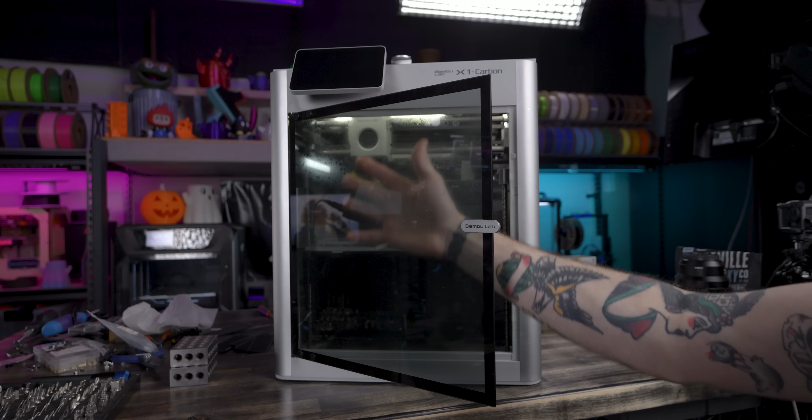We're absolutely going to be making some performance modifications to this machine, but first and foremost, I need to focus on some quality of life improvements and maintenance, such as when you look at this door, it is cloudy, foggy, and nasty, because these days I mostly print ASA filament, which puts off volatile chemicals into the air and puts a film on the inside of this machine. So first things first, I need to clean this thing up, probably adjust the belts. I have over 1,900 hours and I can't remember the last time I did that. And then we're going to install filtration in this machine.

Let's pop the back panel off this machine because I'm sure some of you are going to say, well, the Bambu X1 has a filter, and it does. Inside of there, it has a charcoal filter system that doesn't work properly in my opinion. You see, a machine like my Voron 2.4 has the Nevermore inside of it, which draws in air from inside the chamber, blows it through charcoal medium to filter it, and then back out into the chamber to just circulate the air inside of there and filter it as it prints.

As we're removing the filter from the Bambu, you can see that the fan blows outside of the machine. In fact, Bambu calls this the chamber temperature regulation fan, not a filter fan. This really doesn't make any sense to me because any material that you're really going to want to filter through charcoal, you're not going to want to take the air from inside of a chamber and blow it out the back of the machine as this setup does. That's only going to reduce your chamber temperature. That's why Bambu calls it a chamber temperature regulation fan.

So what we're going to be doing is installing a BentoBox, a community mod originally intended for Bambus but used in various machines at this point. It is an add-on filtration system. It has a HEPA filter to reduce microparticles and charcoal filtration for this machine. It uses a pair of 4020 fans that draw through a HEPA filter from a robot vacuum, through charcoal, and then blow it down out the bottom of the housing. It'll make more sense as we put it together and you see it go together.

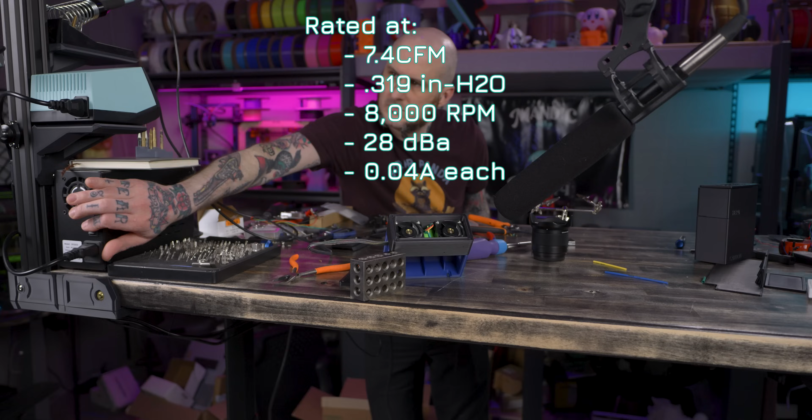The fans that I'm going to use are a pair of Sanyo fans I picked up off of DigiKey that seem to have a good sound profile while still having plenty of static pressure to do what they need to do, moving air through these different mediums.

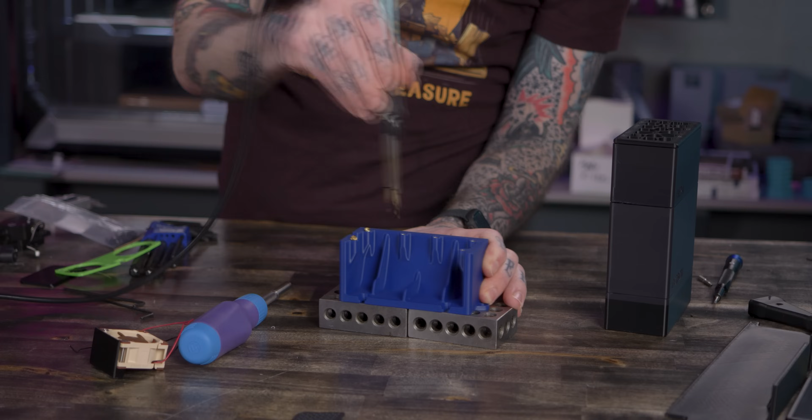Assembly of the BentoBox is pretty straightforward. 6 heat press inserts go into the base. Those are the only heat press inserts in the whole setup. For mine, I designed and printed this 85A TPU gasket to isolate the fans and reduce the vibration from them. This is something I'm starting to do with fans now and testing out. The gasket and those get installed into the fan housing, which then screws into those heat press inserts in the base.

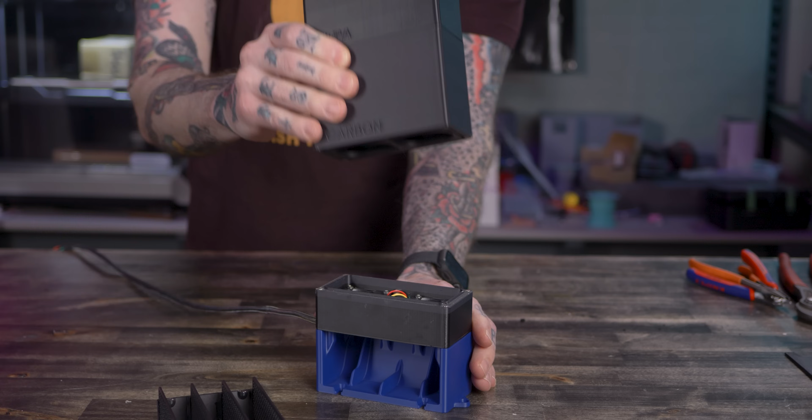Then the entire rest of the filter stack, the carbon section, the HEPA section, and the grate that goes on top all get some magnets installed into them. I use the little CA glue as well, and then they just magnetize together, which forms the tower of filtration that is the BentoBox. Now comes time to get this all installed into the X1, which is really straightforward.

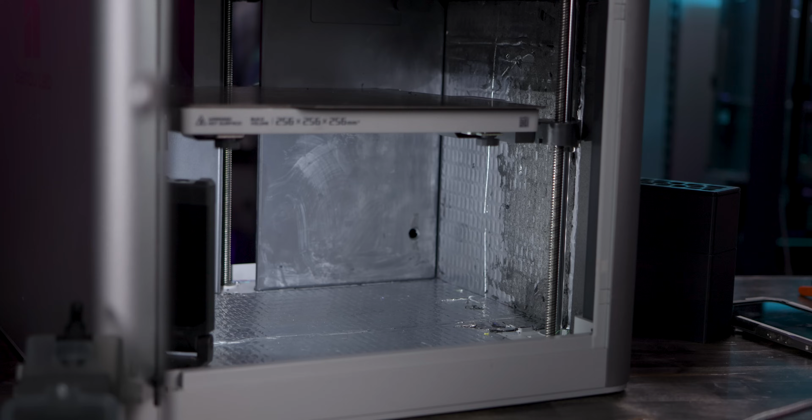In my particular instance, I had to remove the insulation that I had on the inside wall where this is gonna go, but that's something I put in there, and I drilled a hole in the back wall to pass the wire through. Some folks have squeezed it between the aluminum side panel and the back wall. I didn't want to do that. I fed it through a hole. That way it's just really direct, straightforward, and not squeezed in between the panel.

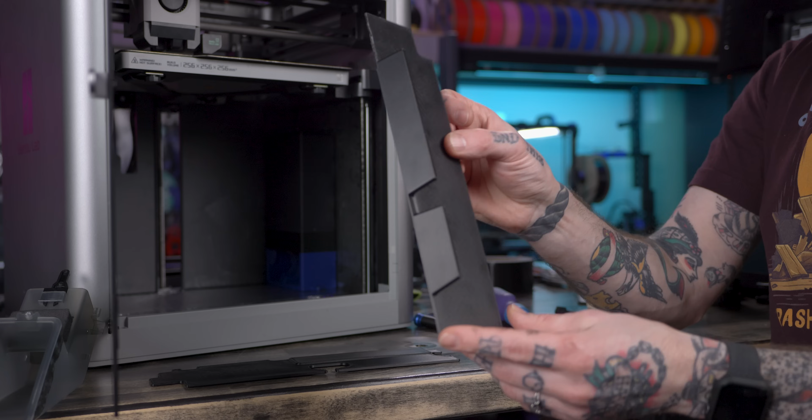Installation is really straightforward with just a single M3 screw going down into the base panel. I also put a piece of VHB tape on the back side of my fan housing so it's supported against the side panel. Of course, our next step is wiring up the fans, but I want to do something while I have this apart. I designed a handful of 3D printable block-off panels for this machine to separate the print area from the electronics box, hopefully to increase the chamber temperature and reduce the temperature inside of the electronics area.

These all mount with VHB tape, and the first one I'm installing does require that the filter housing be removed, as I have done on this machine, so that's not going to be for everybody. But the other ones other folks might find useful. This one is for the big gap that's underneath the poop chute. It VHB tapes in place and then sandwiches between the poop chute and the back panel to fill that oversized gap that doesn't really serve a purpose.

The next one does require that the poop chute's not in place, and then it has to shoehorn up into place, and VHB tapes to the side of the power supply unit, but it has a pass-through for the bed wiring to go through it, and this is the one that's probably doing the most to separate the electronics from the chamber. The last one doesn't even require the back panel to be off the machine.

It installs around the left-hand motor and blocks off the vent that brings fresh air from the electronics box directly into the chamber, reducing chamber temperatures. I believe anyway. I don't actually know if these are going to achieve what I want them to. We'll find out later in the video.

Now we can get into wiring these fans up. You might have noticed earlier that I did get 4-wire fans. That was because I'm going to replace the chamber fan directly and use its wiring so the screen controls and G-code controls from the slicer will control my BentoBox now. Previously, when I installed the Noctua fan in this, I did figure out the odd color scheme on the wiring that Bambu uses. It is black for 24 volts, dark gray for ground, light gray is our tach signal, and white is our PWM signal to the fans.

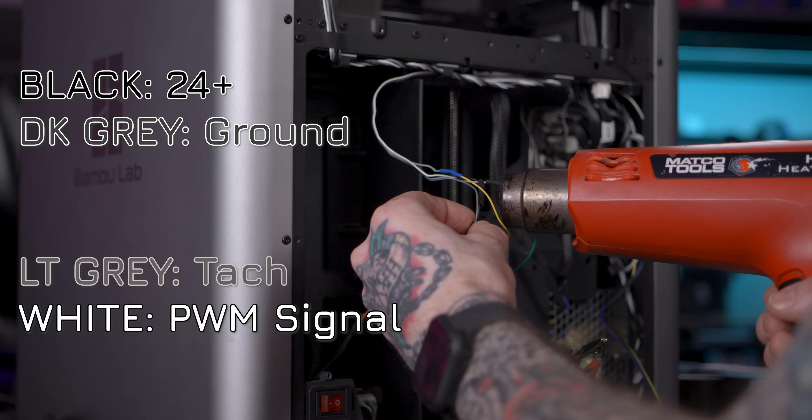With that soldered up, heat shrunk, and all set up, I have a fully functional filter system inside of the chamber of this machine now, and I can control it through the screen-ish. The RPMs on the fans that I installed are higher than the original chamber fan, so I can say set it to 50% fan speed via the screen, and it will set the fans to 50% as I intend, but it will read as 100% because the signal that it's getting is that the fans are running faster than it expects.

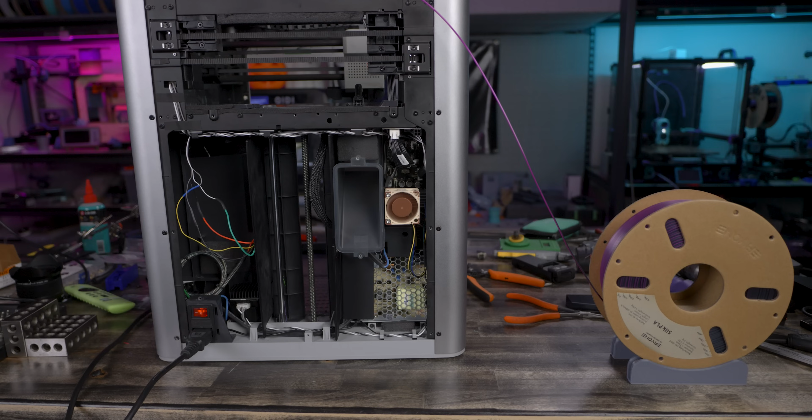That's okay. More than likely I'll run it at 100% all the time anyway, but I can still set it to whatever percentage I want. It's just not going to read properly on the screen. That's all. Before I put the back panel back on, there is one more thing in the electronics box. I designed what I'm calling the fresh air fan mount. It is a VHB tape mount that you can put a 4020 or a 4010 fan on.

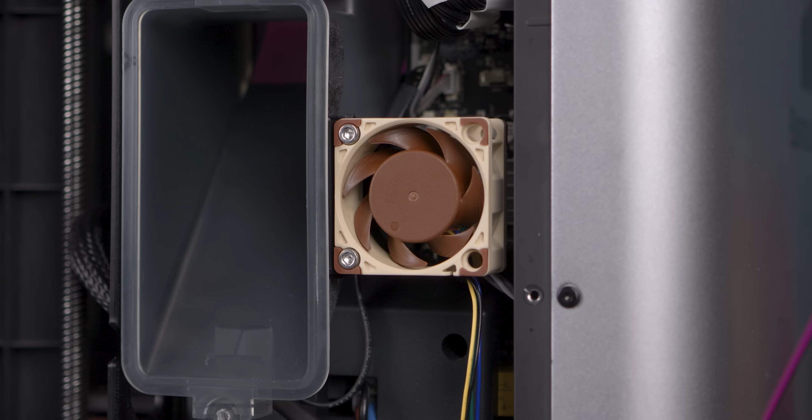I'm using a Noctua in there that I wired up to the original connector for the mainboard fan, and it draws fresh air through the grate on the back of here to better cool your electronics and get rid of that failure-prone stock fan. Though you could use the stock fan and it would get fresh air through the grate too. With those quality of life mods out of the way, it's time to get into performance.

And we're going to start by upgrading the extruder. The extruder assembly on the Bambu X1 ships with hardened steel gears inside of it. The P1 series don't. They come with regular stainless steel gears. So if you're going to be printing abrasive materials often or looking for overall longer service life, you're going to want to upgrade those. Bambu will sell them to you for $19.90. Or you can get these gears from the folks at Fysetc.

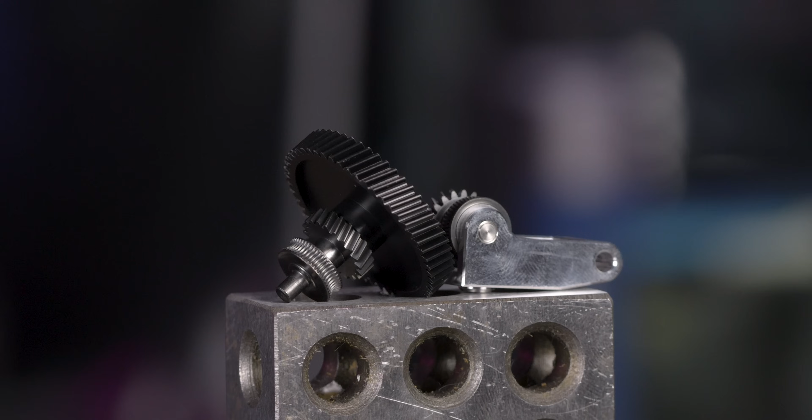These claim a couple of things. They're hardened steel and have a nanopolymer coating on them for longer service life. They have helical cut gears for a better mesh and more surface area on the teeth that are engaged with each other, again for better service life and possibly better torque transfer. The hob gear, the part that actually grips the filament, is machined onto the same shaft as the helical gears that mesh together. The idea there is to improve concentricity. It's not an easy word to say. It means they're nice and round and machined together, so extrusion rates should be really consistent with these.

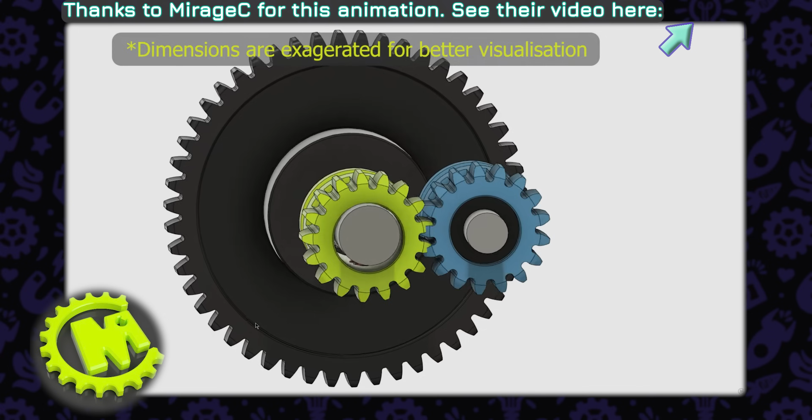The stock Bambu gears, on the other hand, are pressed onto a steel shaft, so there's a chance that they might be slightly out of round from one another, causing slight inconsistencies in extrusion rates as they rotate. Also, the Bambu gears have a plastic arm for the tensioner side, whereas the Fysetc ones have a CNC machined aluminum arm. This does mean that the Fysetc gears are 1.8 grams heavier than the Bambu ones, but come on, it's less than 2 grams out of the tool head to have overall stronger components.

I'm not going to walk you through the install of these gears, as Bambu does have a full wiki about doing it for installing their hardened gears, and it's the exact same process. That'll be linked in the description.

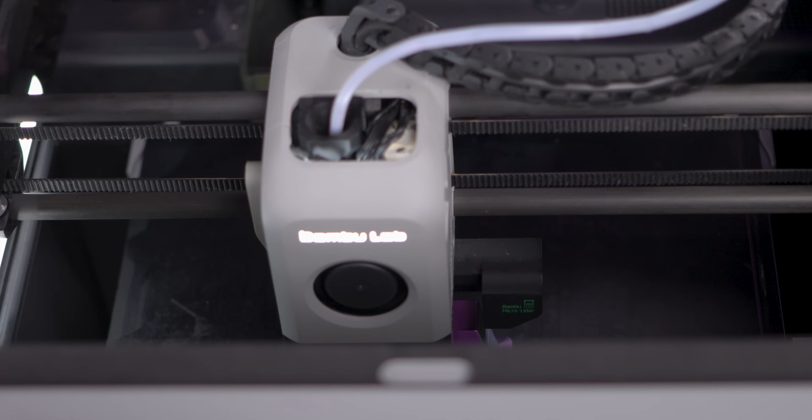I've already run an extrusion consistency print to compare the results before and after this modification. This is by Mihai Design, and it's just a tower with a spiral vase mode print and large layer heights and extrusion widths to just push the extruder harder and see if we get any inconsistencies in our extrusion. So we'll have this for before, and now let's run an after print. I chose to use a co-extrusion silk PLA from AliExpress, figuring the two different colors might highlight the layer inconsistencies in this tower a little bit better.

It kinda didn't as far as I can tell, and honestly, our before and after results really don't look that much different. If anything, it might just be a run-to-run variance between the two. Now clearly this is just one consistency test. I'll need more long-term testing, especially to see longevity of these gears, but I don't see a night and day difference running this new Fysetc gear set.

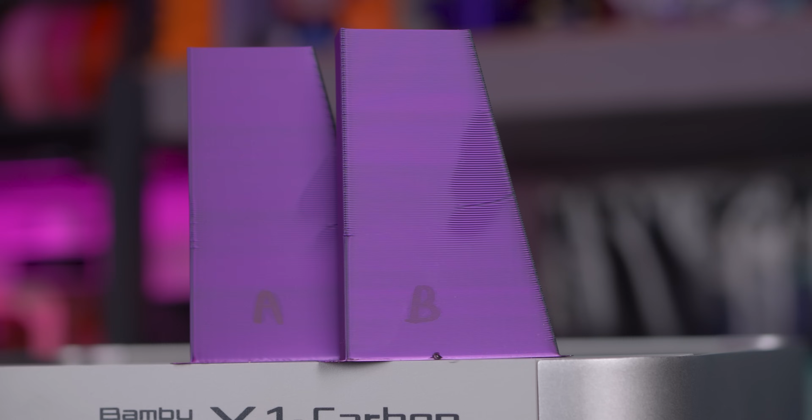That said, if you want to maintain your machine by replacing your gears, or you have a P1 series and you want to upgrade the gears in that, the Fysetc gears can be had for $3 to $6 less, depending where you look, than the Bambu gear set. So you might be getting yourself a possible upgrade, and either way, it's slightly cheaper.

Now it's time to really take this up a notch by upgrading hotends on this machine. I say hotends because we're going to be testing a couple of them in here. I've previously covered at E3D's factory, you can check out the link up here, the E3D ObXidian High Flow Hotend, and that's the one I know that I want to put in my machine. But in that video, in the comments, a lot of folks were talking about the cheap AliExpress hotends that are out there that are high flow. So I am going to test that as well.

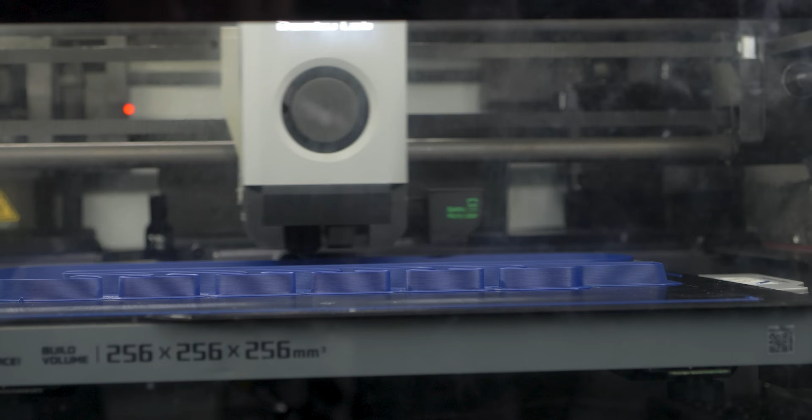Before we dive into the pile of numbers that I produced from my testing, I do want to break down my thought process on how I tested for flow rate numbers. I use a racetrack flow test instead of the pile of little printed out blobs on the bed and weighing them out individually.

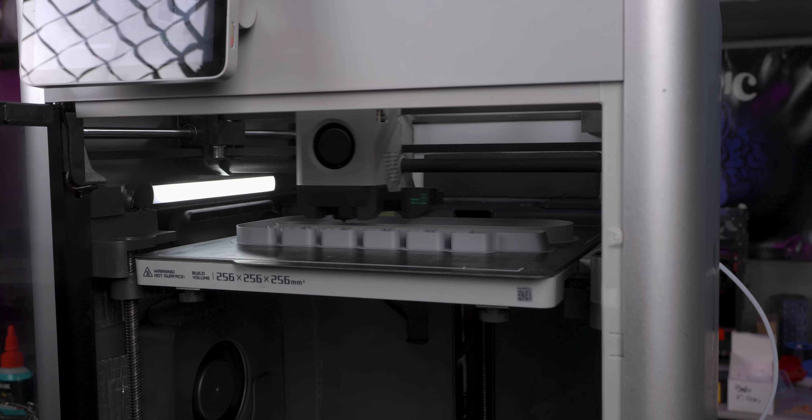Scientifically, I understand why weighing them out specifically like that will get you an ultimate number. But I find that in real world application, when you're layering layer upon layer and you have that pressure difference of pushing down on the layer below it and the filament being drawn behind the hot end, that things are just different. It's one of those places where theory and real world application kind of collide and don't line up

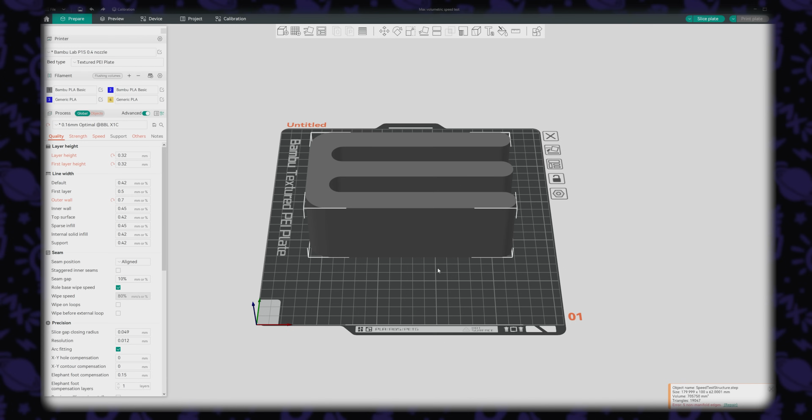in my experience. With the racetrack test, as it travels up, the speed increases, which increases the flow demand on the hot end until we reach a point of either diminishing return or failure entirely. I am using the inbuilt racetrack calibration tool in Orca Slicer, but I've been replacing the model in it with that from E3D, which has overhangs in it. It has these tighter sections where it has to make a lot of quick turns, and I feel like this might have a chance of highlighting inconsistencies better than just a single wall in a straight line will.

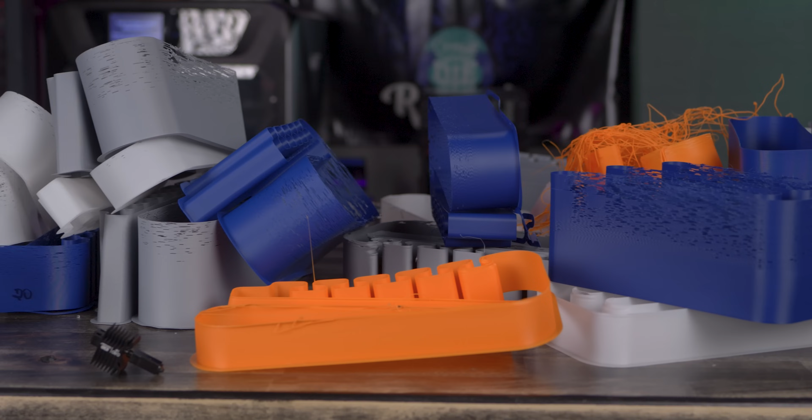I use 3 different filaments for my testing. Creality's Hyper High Speed PLA, because folks said they wanted to see a high speed filament used in this type of testing. I also used Polymaker's Matte Polyterra PLA, because that's the material I use the most when I'm printing with PLA, and Polylite ASA, which is the material I use the most these days and what I really wanted to know for my own purposes.

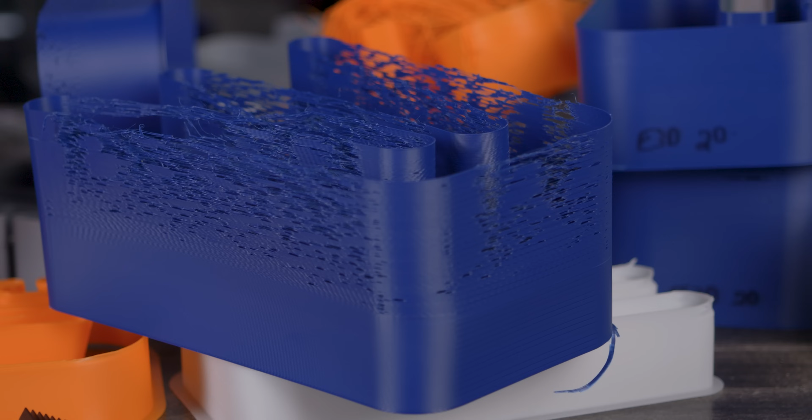Here's the point where probably a handful of people are going to head to the comments and start giving me guff about this. I ran all of my testing at the material temperatures that I usually print at. For the ASA, I primarily run this at 245 Celsius, so that's where I ran my testing at. For the PLAs, I've ran both of them at 220, even though I usually run the Polyterra at 215, because I wanted to just keep a G-code the same between those two materials.

The reason for this, I know that I could run, especially the ASA, I could bump it up quite a bit and get better flow out of it. But I want to know what the maximum flow rates are where I'm actually going to be printing things. Here's my thought process. So why do I care if I can get higher flow running higher temperatures on a material when I get poor quality overhangs and bridging and general mushy details on my prints?

Sure, I could push things harder, but then I'm going to be fighting cooling issues or running into other problems. I want to know how much flow I get with the materials printing how I print them every day. Simply put, I test the way that I'm going to be printing the material on a regular basis.

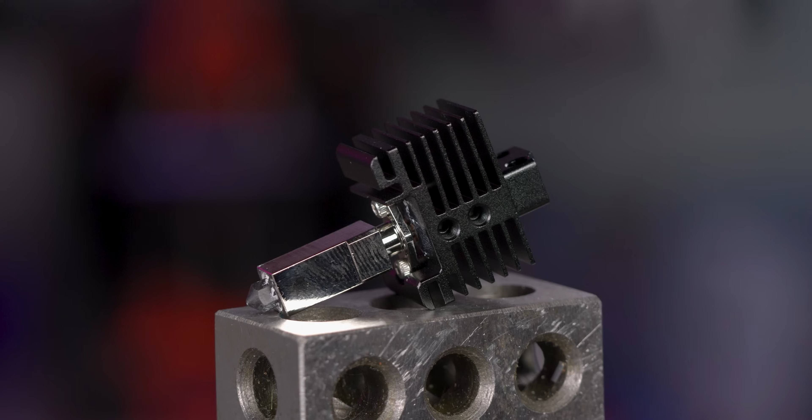Let's take a quick closer look at the AliExpress hotend, because there are a couple things I do like about it and some I don't that people seem to ignore. A lot of folks really like that this has 2 screws and a plate that allow it to add support to the heat break for the heater block to the heat sink. I personally have never had a problem with this on any of my Bambu hotends. None of them have bent in 2,000 hours of printing and plenty of failures, but if this is a pro

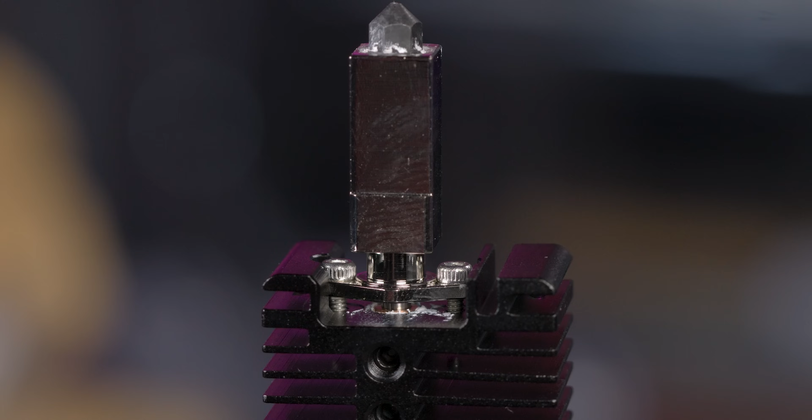to you, it's here. This does have interchangeable nozzles, so you can easily change out to different nozzle sizes, and the one that I got came with these high flow nozzle inserts. And while these are hardened steel, the inserts are copper, and this is a negative to me. If you want a wear-resistant design, pure copper for your high flow is not going to do it. It is going to wear rapidly when using materials that require hardened hot ends and nozzles.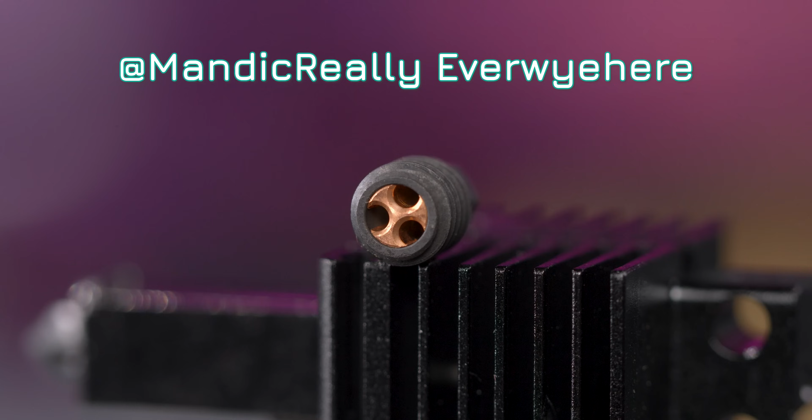I'm not going to get to torture testing this in this video, but check out my other social medias and I'll post when I get around to torture testing that thing, and I'm betting it's not going to last too long, but I could be wrong.

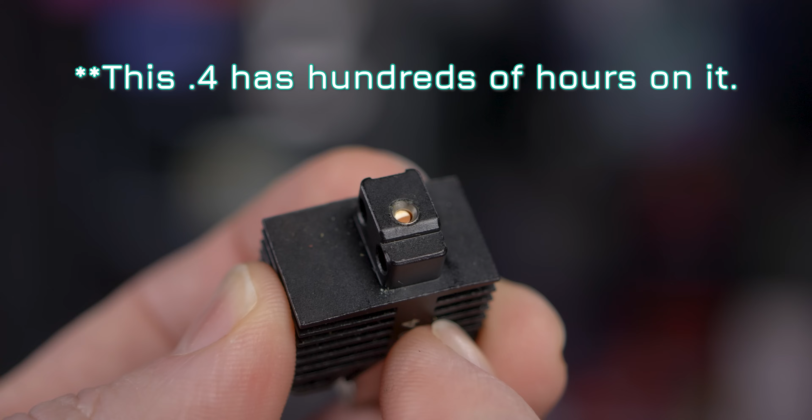Another point about this is the entry to the heatsink itself is tapered so that the filament coming in after the cutter can be guided into the bore of the heatsink, but it's not covered with anything. It's just aluminum. The Bambu and E3D units have a steel cone there to help wear resistance, and after hundreds of hours of printing, I've never noticed any wear on those.

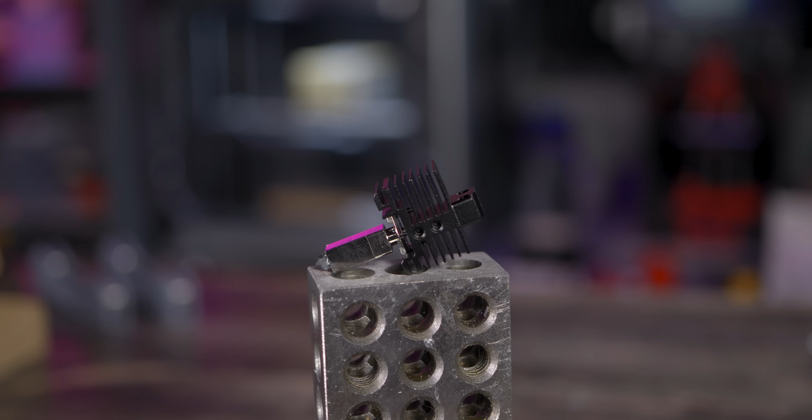I question whether that won't be an issue on the AliExpress hotend. In fairness to the AliExpress hotend, this will vary depending on what listing you look at, but I paid $18.53 delivered to me in Philadelphia. That came with a heater element, a thermistor, and those high flow nozzle inserts, as well as some thermal paste and a really cheap silicone sock.

Now, that is about close to 50% the price of a complete hardened hotend with fan from Bambu, and a quarter the price of the E3D High Flow that doesn't come with a heater, thermistor, or fan. So this is where we really need to break down the results and take a look at how much flow we can get out of these different hotends on different materials.

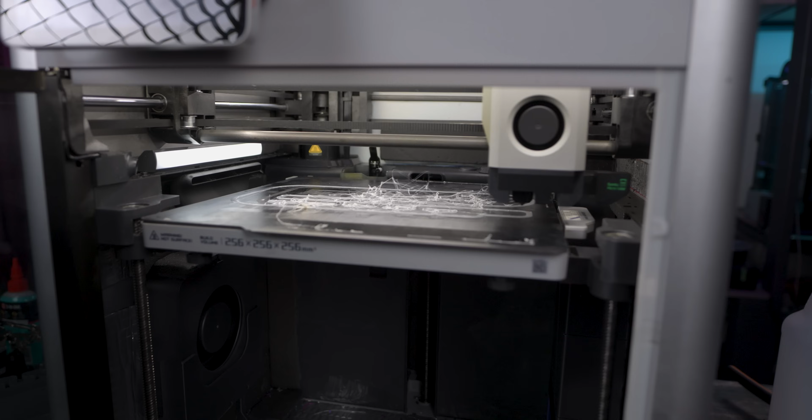And immediately the AliExpress hotend clogged. I don't know what the heck happened here. I did have to install the high flow nozzle into this hotend, and the filament path was clear when I did so. I ran the first test, it clogged. I pulled out the filament, pushed it through with a hex wrench, ran a test again, and it clogged again. So I pulled out the nozzle, I ran a hex wrench through the throat of the thing, cleared it out as much as I could, and then I was able to get to testing with it.

Some final notes before I show you results. I ran each test with each filament on each hotend at least twice. Some I ran more than that, but what I'm going to show you is the averages of the runs that I got for each filament on each hotend.

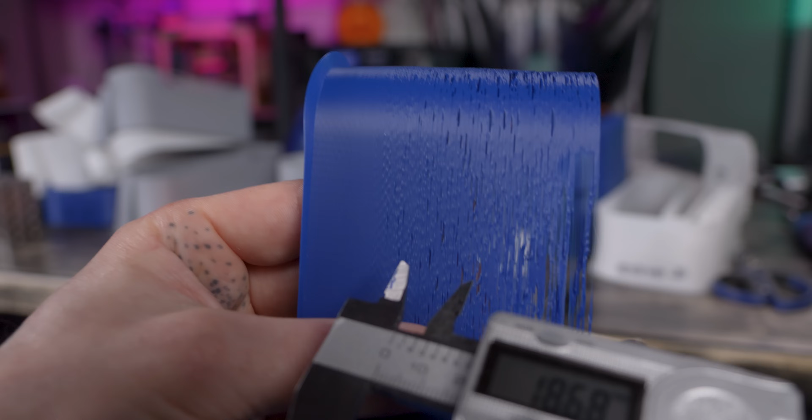I'm also not going to the point where I see holes when I measure. I like to err on the side of conservative with my results, so I'm going to the point where I start to see clear physical defects in the surface finish of the prints. That's usually before a hole appears. I would rather find what is a really usable day-to-day flow rate and not overstate some wild marketing number that you folks are then going to be disappointed if you don't achieve. All that said, I was shocked by some of the results that I got.

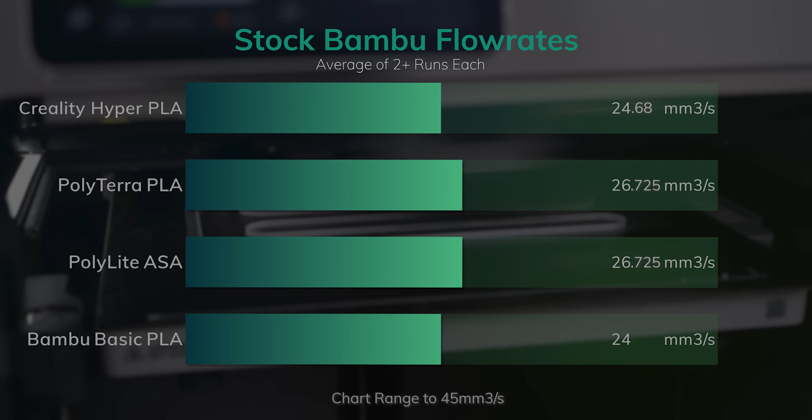Taking a look at the results from the stock hotend, there are a couple of things that are quickly evident here. One is that the high-speed PLA, the Hyper stuff from Creality, it's marketing talk. The PolyTerra from Polymaker outperformed it in every single test that I ran.

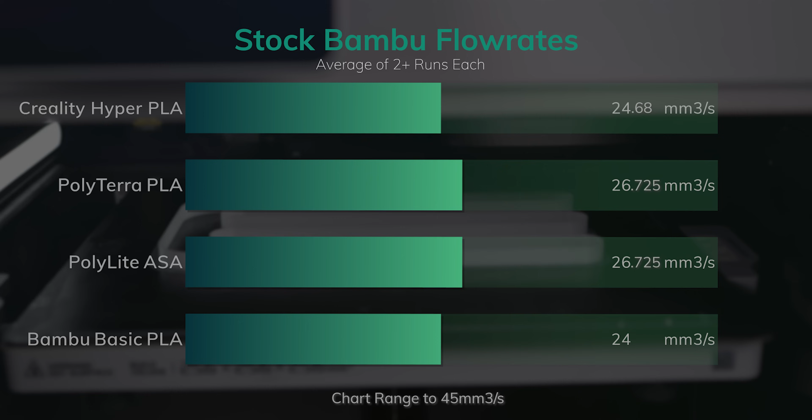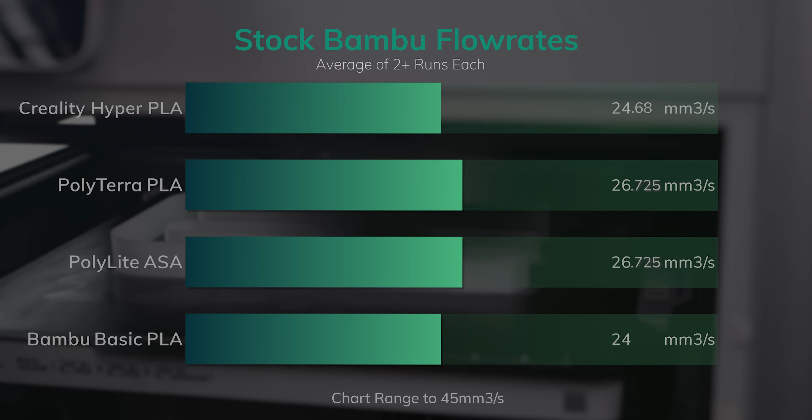The second thing is that this is the only hotend that I ran Bambu filament through as well, just to sanity check myself, because these numbers were so good that I had to test something else and compare results with some results that other folks had gotten. Simply put, the stock hotend flows better than I have been saying it does for quite some time, and I need to eat crow. But then in comes the high flow variants, and then things get really interesting.

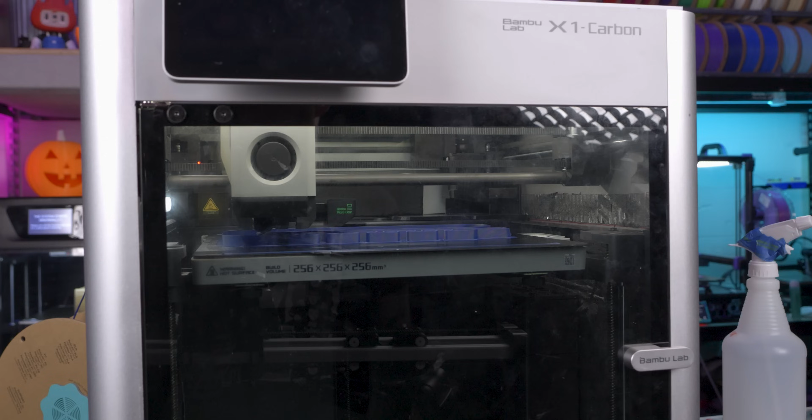Adding the AliExpress hotend to our chart, we can quickly see that it's not doing as well as I would have expected it to. A lot of folks have told me they're getting 40 millimeters cubed per second with the AliExpress hotends. And don't get me wrong, there's probably multiple versions out there, and maybe one of those is flowing better than the one that I got. Maybe I got a lemon, but the results that I got were only marginally better than the stock hotend. They were better, so if you like some of the options of what this hotend offers for you, it is a flow rate improvement.

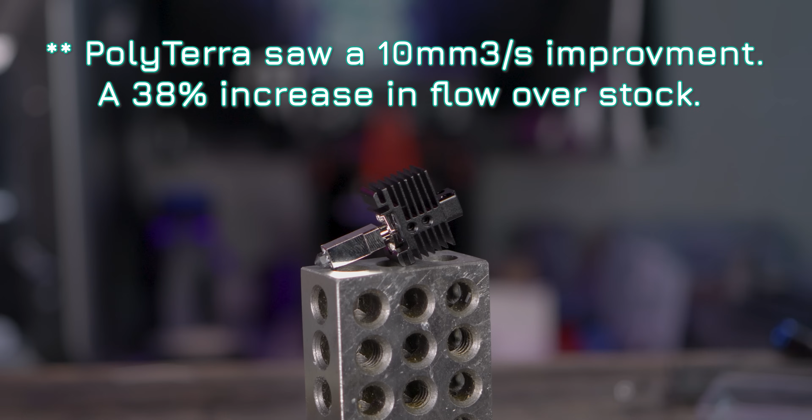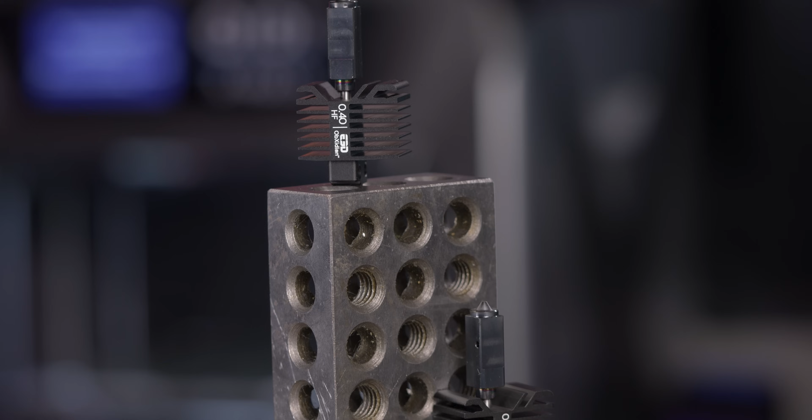Then in comes the E3D ObXidian High Flow, and I tested that at E3D's factory. I put it through its paces, and I wasn't blown away by the numbers I got. It was a big improvement, but not even as much as they expected I would get. My testing here, on the other hand, is a whole different animal.

If I average out each of the 3 filaments and all of the runs that I got, it adds up to 42 millimeters cubed per second. The answer! Comparing that number to the average of the stock hotend's flow, that is a 60-point-something percent increase in flow. Exactly what the marketing material claimed it would do. I'm not gonna lie, I expected the results of the E3D hotend to be the best of the bunch, but not this good.

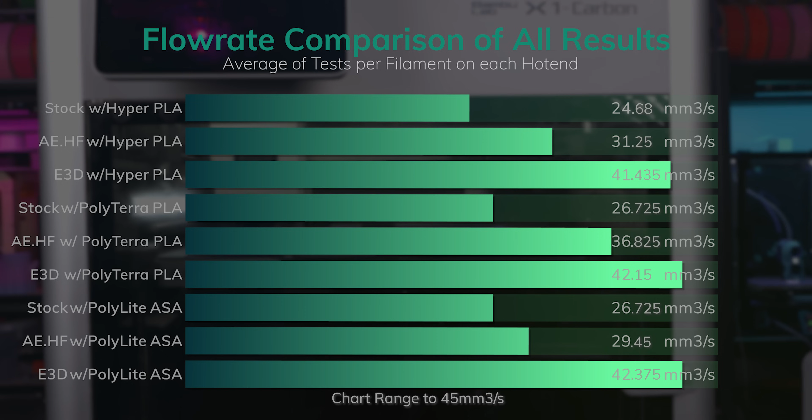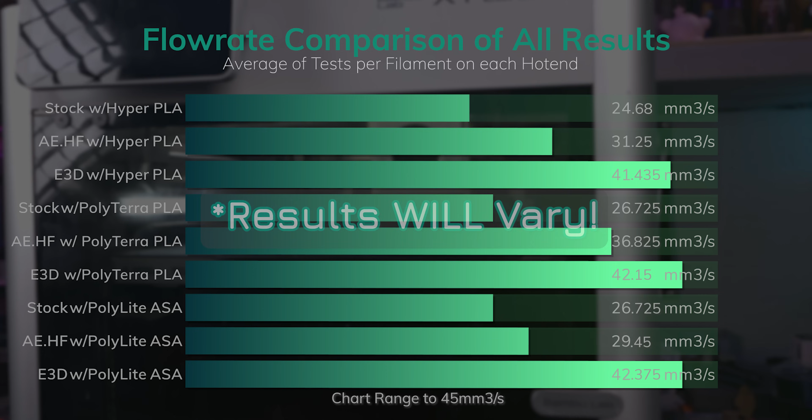The testing I did at E3D didn't show me it to be this darn good. I think the Prusament PLA they gave me there to test with wasn't doing them any favors. Now, big asterisk here, your results will vary. From run to run, color to color, filaments will vary. Even if you're running the exact same materials that I am, you might not get the same results.

The ambient temperatures might be at play. The heater elements that I'm using in my machine may be a factor. Though I did try 2 different heater elements on the AliExpress Hotend because I assumed maybe the heater they sent with it was weak, but that didn't make any difference.

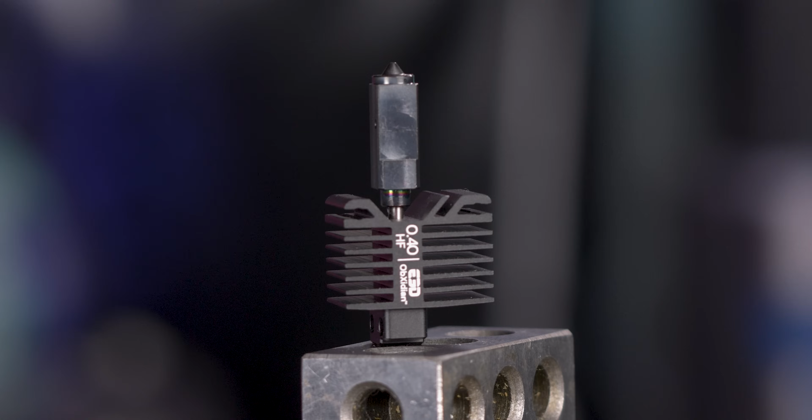Don't get me wrong, I understand that the ObXidian High Flows from E3D are expensive. They are pricey. I really wish they came with something more for how much you're paying for them, but I see a value here. To me, they are a buy once, cry once product. I should be able to put these in my machines and just run them. With the hardened design and the ObXidian coating, the unleashing of more flow, they should hold up to whatever I throw at them for hundreds or thousands of hours.

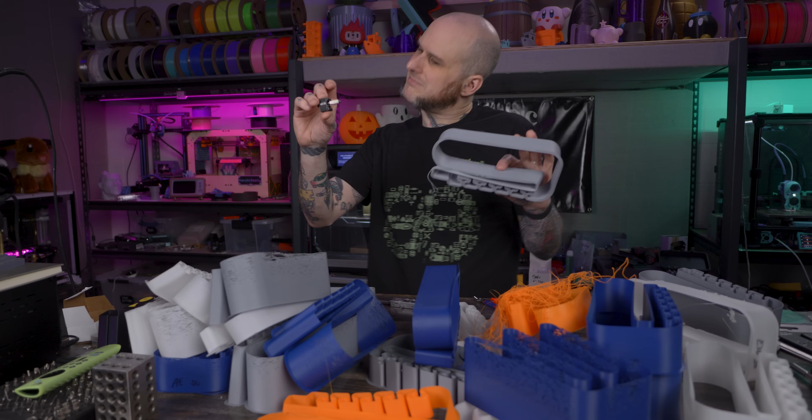And I'm going to be testing that long term. Don't get me wrong about that. Though I would highly recommend sticking to quality filaments so you don't have to worry about clogs taking out your expensive Hotend. I do want to note I ran into one kind of big issue with the ObXidian High Flow, and I know ModBot ran into the same problem.

I had one test that stopped halfway through with the Polyterra PLA, because it was the best flowing material I had here, because of a heater malfunction. It just couldn't keep up heating up the filament through this Hotend with the glass top and door open. So a lot of airflow through the chassis for PLA printing, and it couldn't keep up as a result.

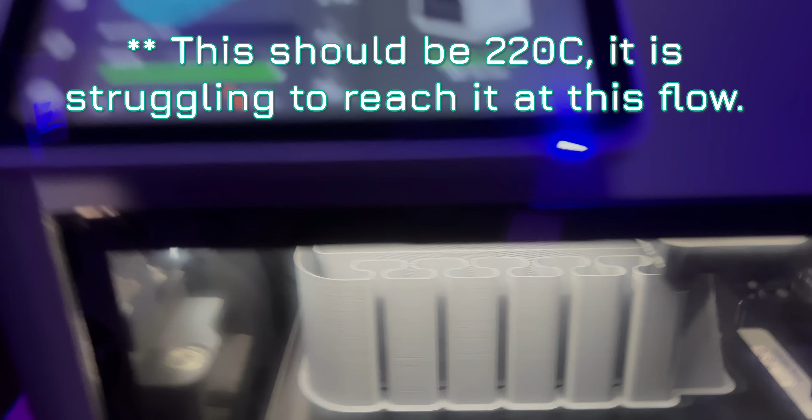I closed the door and put the top back on, and I was then able to just run the same G-code and complete the print, but it had maxed out the flow rate by the time it stopped anyway, so it really wasn't a big deal. Does seem like they need a higher wattage heater on this thing, but I don't know how you would achieve that since you can't PID tune the Bambu machine. This is something that E3D and Bambu might need to look into.

I do have one modification left before we put all of this to the final test and really push my X1 to the limits. Realistically, testing flow rates probably should have been its own full dedicated video, but the last modification we're going to throw on is the BenzC 360 cooling duct. I'm generally not a fan of splitting up a single fan into this many paths for air to travel because it's going to take the path of least resistance.

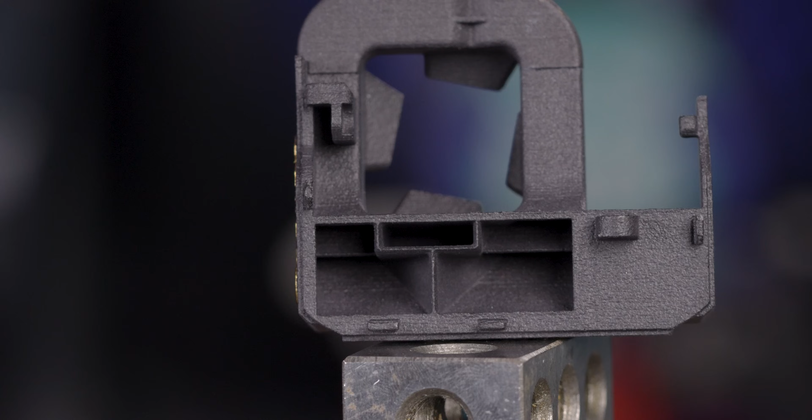But it does seem like they really designed this and put some thought into it. Maybe actually fluid dynamic tested it, because the ducting inside of it seems to really guide the air to where it needs to go. Let's get it installed and we can see for ourselves. I did print an overhang test for a before test. We'll do an after once this is in.

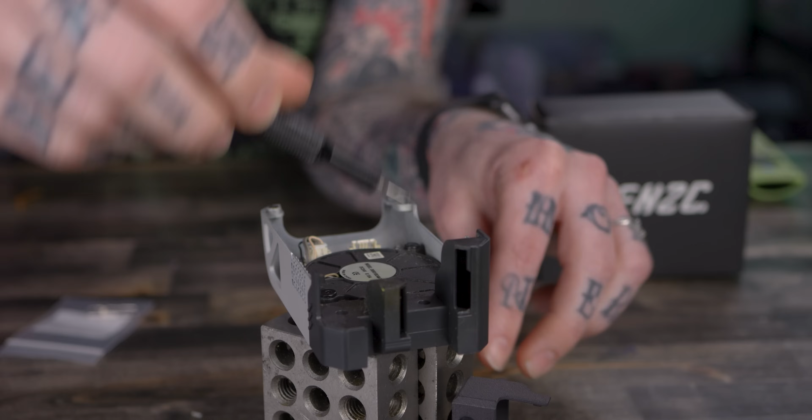Assembly of the BenzC is straightforward and starts with disassembly of the original shroud. You have to remove 4 screws that are holding the ducting to the tool head shroud and then pull it out of a few clips that are on there. Then we have to annoyingly install our own magnets into the BenzC duct with a little bit of super glue. They are fiddly little and you better make sure you get the polarity right for your cover mount to your tool head. Once you've got super glue on your fingers, you're ready to move on.

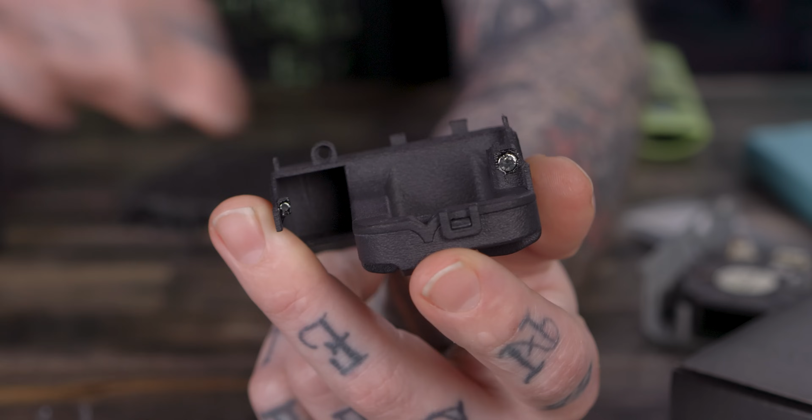Looking at the chunky nature of the BenzC duct, I expected it to be heavier than the stock one, but it's actually just a hair lighter, so I'm making up a little bit of weight that I added with those Fysetc gears earlier. Then assembly is as simple as clipping it into the clips on the tool head shroud and installing 2 of the 4 original screws to hold it on.

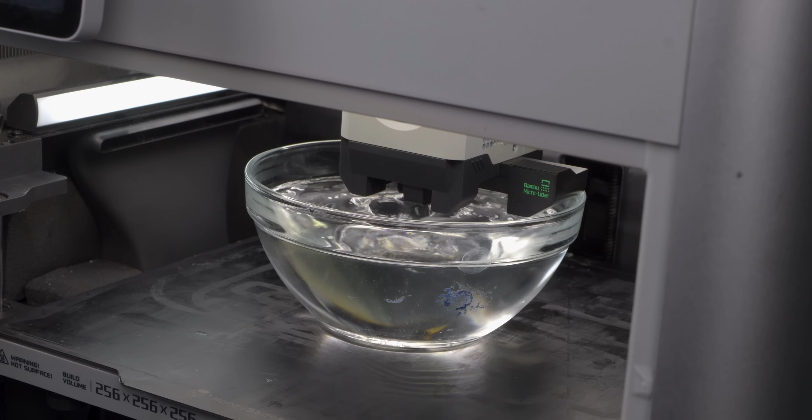I wanted to try and visualize the airflow, so we're doing the old, very scientific bowl of water test here. Now, something really interesting popped up pretty quickly when I went to the original duct. It's blowing off center. It's not directly underneath the nozzle where the airflow is focused.

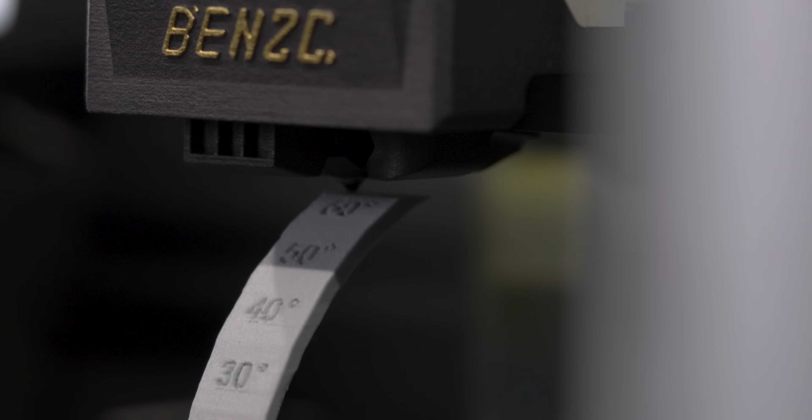When you switch back to the BenzC, you actually notice that it's much more centrally located underneath the nozzle. So that impressed me right off the bat. It's clearly making an improvement, at least in the direction of the airflow. Then it was time to run a handful of overhang tests, and I actually swapped back to the original duct just so I could get a few more results and compare a little more in depth for you.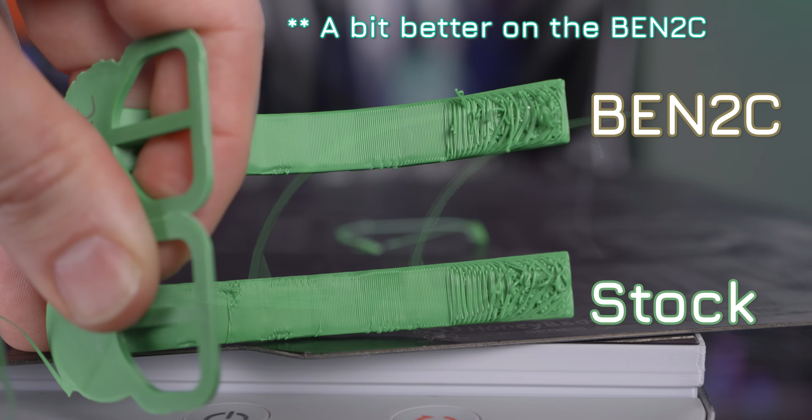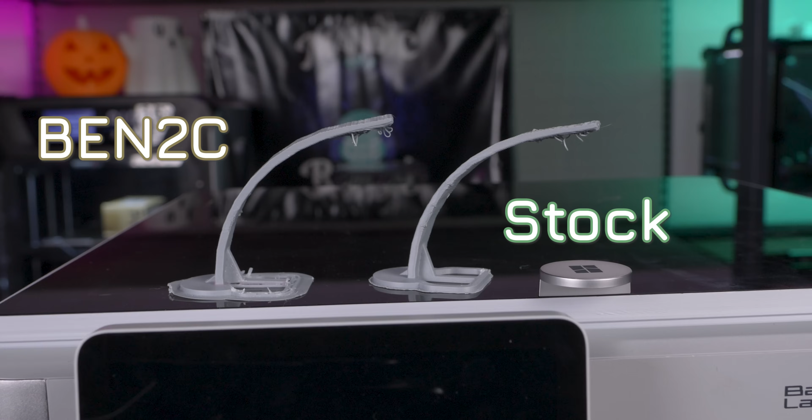Taking a look at this first test, this was printed in ASA with a closed chamber, and I did dial in settings for overhang improvements on these, but I don't see a big difference between the Ben 2C duct and the stock ducting. Looking at the gray Polymaker PLA prints, once again, I'm seeing pretty much the same thing. Maybe a slight improvement with the Ben 2C, but not anything dramatic by any means.

The most dramatic improvement was the first overhang test that I did. The one that I did with the stock duct got knocked off of the bed pretty early on, about halfway through it, and wasn't able to complete. The Ben 2C one also got knocked off of the bed, but way further into the test, and it does seem to be markedly better.

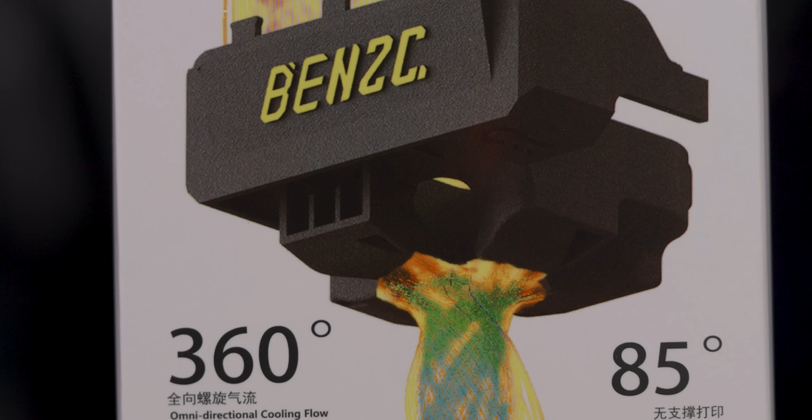For the $30 that this currently runs on 3D Hub Canada, I think this is probably a worthwhile modification if you're trying to squeeze every last little bit out of your X1 or your P1 3D printer. If you're happy with the part cooling as it ships, you're probably not going to care about this. I've always been a little underwhelmed with the part cooling on this machine. Now I'm mildly whelmed with it. So this is something I'll probably be putting on the P1S as well.

And with that modification checked off the list, it is time to test my ultimate Bambu X1. And how else would we do that but to print a speedboat Benchy? Following the rules, we're going to see how hard we can push this thing and how fast we can print a silly little plastic boat.

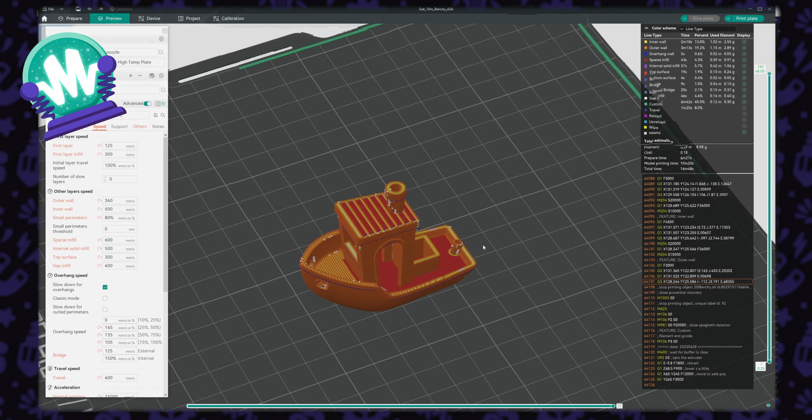Of course, printing quickly begins in the slicer. I started adjusting settings I knew would help me pick up speed, and then I dove in a little deeper, tweaking on different settings and watching the preview for how long the print time said it was going to be. When you're really starting to push speed, slicer estimates, I find, become pretty inaccurate, but they can at least give you an idea. If you adjust a setting and the time goes up, it will mean that your time will go up in the real world.

After I got settings really dialed in where I was pretty happy, I wanted a sanity check on where I was headed with it.

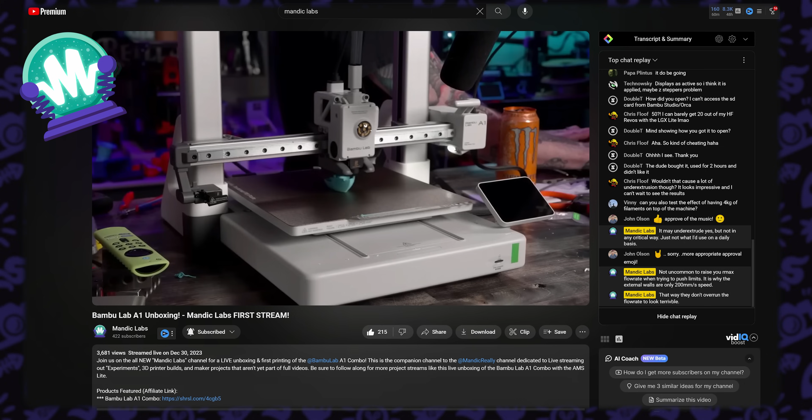I was able to go download the Benchy 3MF file for Bambu Lab machines that they had tweaked and tuned to get it fast. I was able to open it up in Orca Slicer and take a look at it to see what they had done. And it just confirmed some of my ideas for where I was headed.

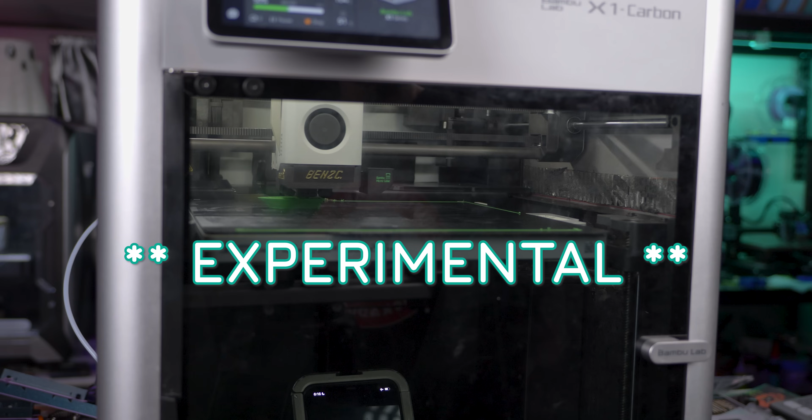For your information, if you want to learn a little more about what I was tweaking in the slicer to get these sub 10-minute Benchies, I am uploading a 3MF file of my slicer profile, what I used to achieve one of these. I honestly don't remember which one or know how fast that particular one will go, but you can take a look at the slicer settings that I changed. I honestly don't recommend using that at all. It's purely experimental. You would need to have the high flow hotend to go with it, and use at your own risk if you want to start uncorking your machine.

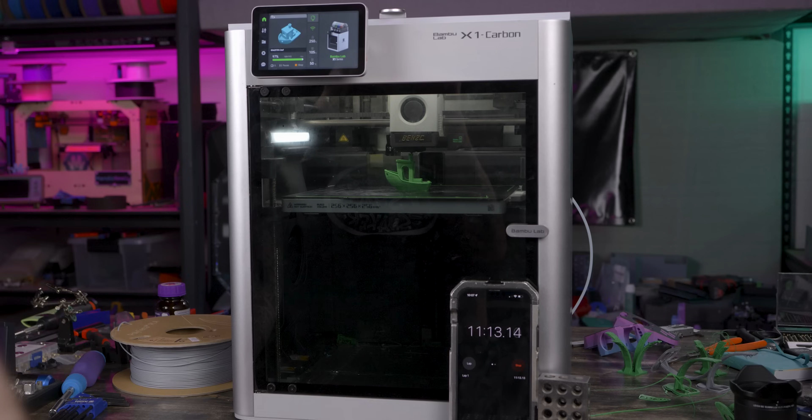When I started this project, I knew a 12-minute Benchy was probably going to be realistic. I didn't expect to break 10. The first one I printed was 11 minutes and 18 seconds. I dove in, tuned and tweaked and played with things and pushed this machine harder. The fastest one I was able to get, which is slightly more of a Benchy shaped object, is 9 minutes and 31 seconds.

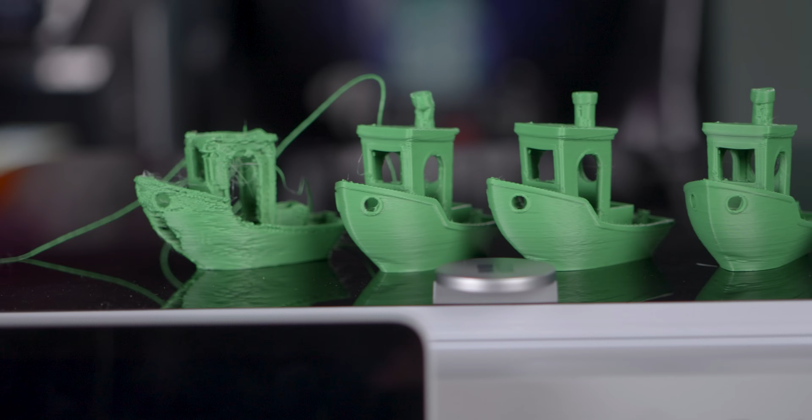I'd say my personal favorite as far as both quality and speed was this one at 9 minutes and 53 seconds. None of these are perfect. Absolutely, the SD card Benchy that comes with this machine, it takes 15 minutes to print, is a better quality one. But I shaved over 30% of the time off from that Benchy to these.

And that thought of how much of improved speed on this thing, at the detriment of some quality, is where I'd like to stop and talk about my modifications that I've made here and some final thoughts on high flow hotends and all of this.

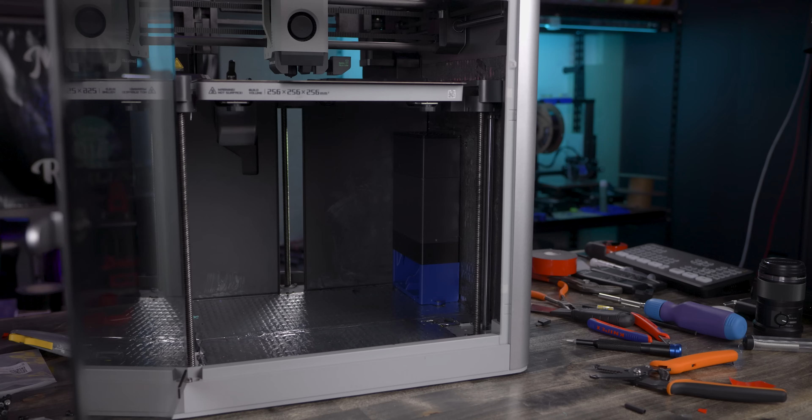Looking back here at the end of this project, I am pretty thrilled with where my Ultimate Edition Bambu X1 is at. The hotend is flowing better than I expected it would. The BentoBox charcoal filtration, I'm absolutely already noticing less ASA stinky smell around, which is going to be good for my health working in the studio.

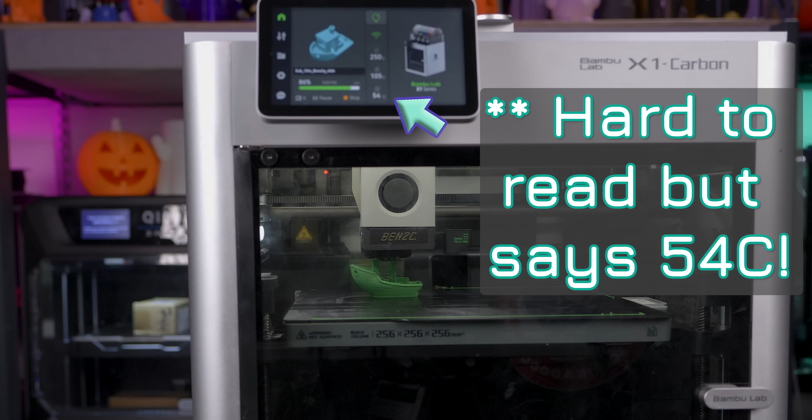All of these Benchys were printed in ASA, and these are fairly short prints, as you saw, but I already saw increased chamber temperatures. So between those baffles and block-off plates that I put inside of here and the BentoBox circulating air, my chamber temperatures are already going up, and that's exactly what I was hoping to see.

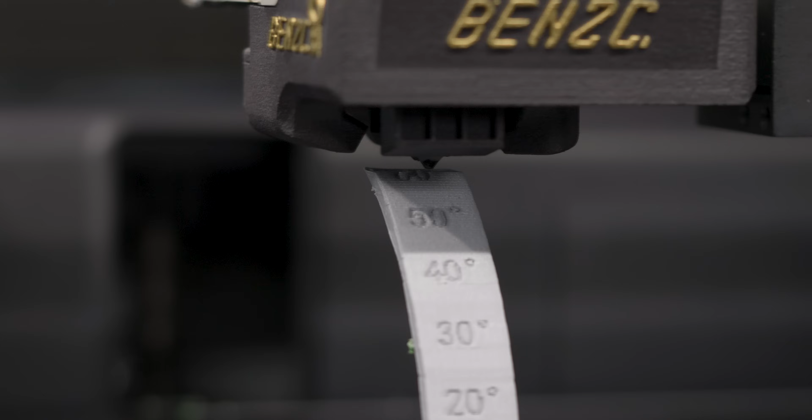Now those Fysetc gears, I'm going to have to long-term test those. That BENZC duct didn't make a massive difference, but it did improve things. And these Benchys were printed in ASA with the auxiliary part cooling fan at 100%, the part cooling fan on the hotend at 100%, and I'm still fighting cooling issues. So it probably would have been worse if I had the stock fan duct on here.

When I made the initial video about the E3D High Flow Hotend, plenty of people asked in the comments, why would I need higher flow? My Bambu's already fast and flows plenty. And for those folks, I have to say, it's probably an if you have to ask, you don't need it kind of thing. For me, it's going to mean that I can uncork this machine and go faster when I want, but most of the time I probably won't.

I run this machine slower than default speeds and accelerations most of the time to improve quality. Now, my testing with these Benchys is showing me I could probably push the speed up a bit on this thing and still get acceptable quality out of it, so I'm going to have to tweak on that.

But when I'm behind the 8-ball on a project and I need to get something done, which is way more often than I care to admit, this and the modifications I've made to this machine are going to allow me to just put the pedal to the metal and get things done quicker when I need to. And with my X1 back in its home, I do believe that's where we're going to wrap this project up.

You may have noticed that I didn't put X1 Plus on there. There's a reason for that. I never responded when they emailed me about that whole project. Seriously, I applaud what that team is doing, and I will almost certainly install that when it's publicly available, but I was just burned out on all the negative talk around Bambus, and I didn't want to be associated with it.